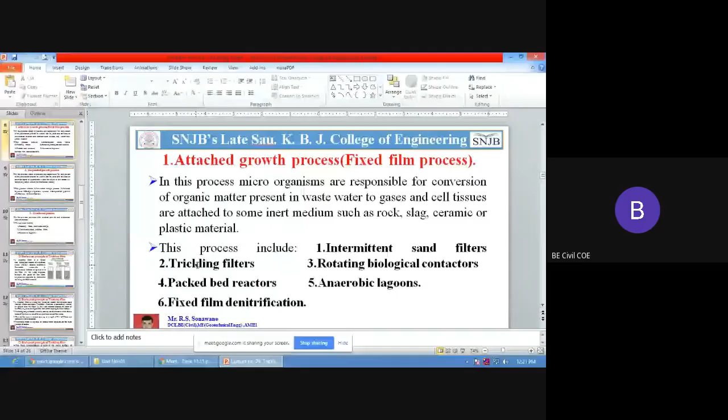So, is my screen visible, everyone? Is it visible, everyone, my screen? Yes or no? Yes, sir. Yes, sir. No, sir. Yes. Yes. Yes, sir. Okay, now. Okay, very good.

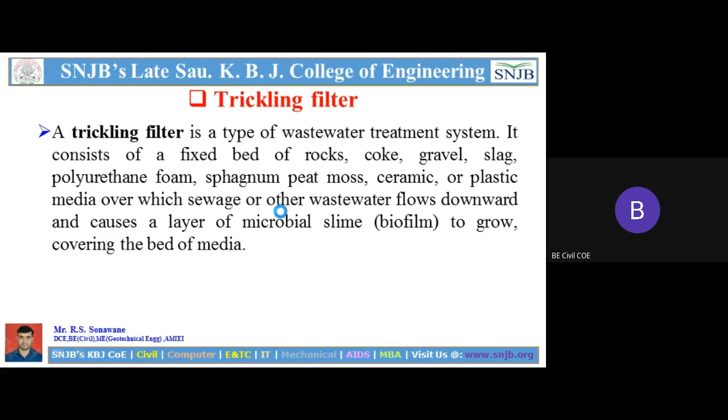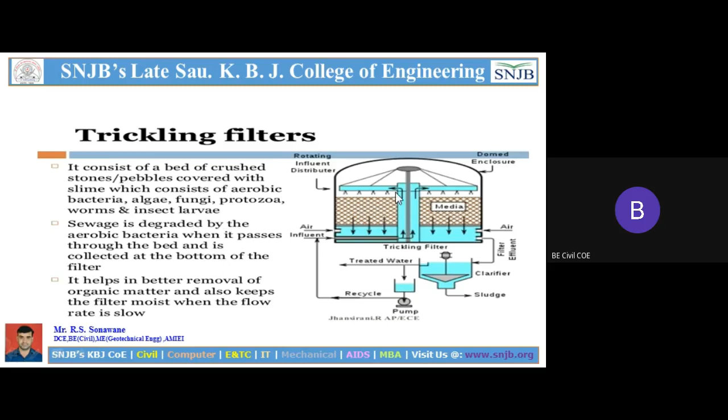It passes through the bed and is collected at the bottom of the filter, which will be the clean water. It helps in better removal of the organic matter, and also keeps the filter moist when the flow rate is slow. Okay, so these are some theoretical concepts and the working process of a trickling filter.

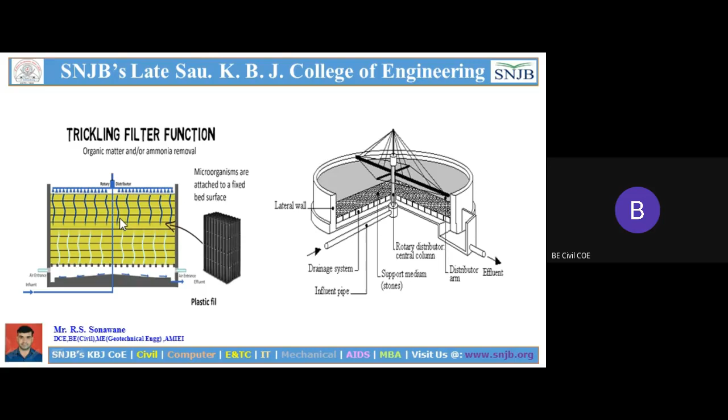In the media, there may be plastic media provided. Here is a plastic media in this picture, and the microorganisms are attached to the fixed bed surface. Once again, the plastic media has microorganisms in terms of bacteria, algae, or different types of microorganisms, and it helps in aerobic condition to degrade the material which is in the form of pollutants. This is about the detailed features of a trickling filter and its function.

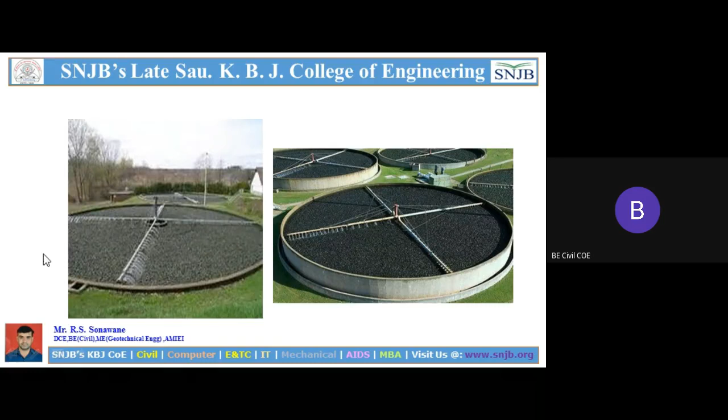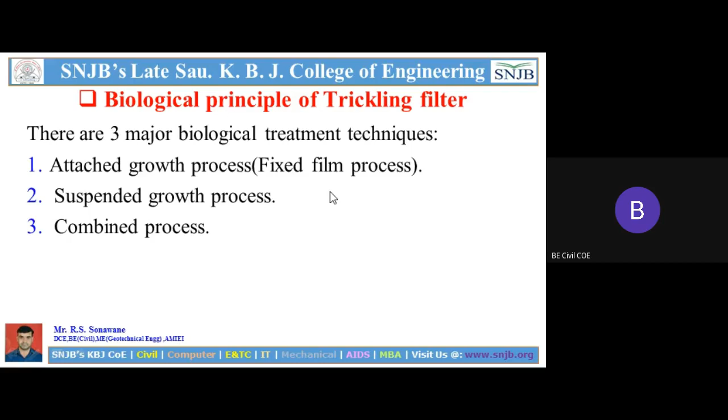So now, what is the exact biological principle of a trickling filter? In general, there are three major biological treatment processes or techniques. First is the attached growth process, that means a fixed film process. The second one is the suspended growth process, and the third one is a combined process. We already discussed this in the previous 2 or 3 lectures. So these three are very important biological treatment processes.

Now we can see which system is involved in the trickling filter. First is the attached growth process, also called the fixed film process. In this process, microorganisms are responsible for the conversion of organic matter present in the wastewater to gas. That means organic matter can be converted into gases, a process called oxidation, and it also produces cell tissue, attached to some inert medium such as rock, slag, ceramic, or plastic material.

So there is some inert medium or inert bed which mostly holds the microorganisms, and those microorganisms are responsible for converting the organic matter to gases or different cell tissues. This is the attached growth process, the first type of biological treatment process. Which units does this process include? Intermittent sand filter, trickling filter, which we are discussing, and rotating biological contactors.

So now it is clear which concept of biological treatment is involved in trickling filters. The trickling filter works on the biological principle of microorganisms responsible for conversion of organic matter to gases or different types of cells, present on different types of bed: rock, slag, ceramic, or plastic materials. This is the simple biological principle of trickling filters, and these units work on the attached growth process.

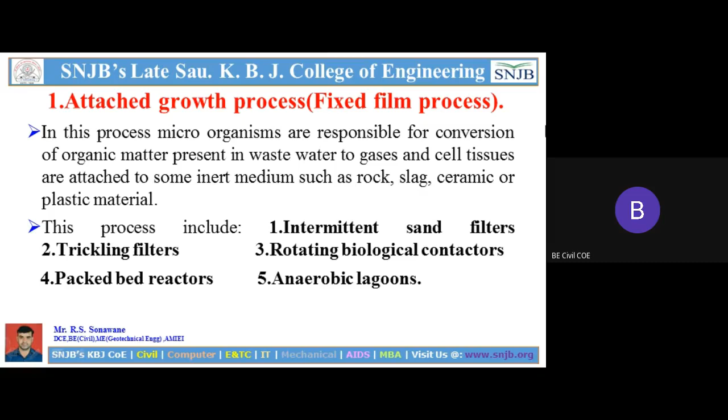This process includes activated sludge process, aerated lagoons, sludge digestion systems, suspended growth nitrification, and denitrification. So these 5 to 6 units are involved in the suspended growth process.

Suspended means what? When the sewage goes into a particular unit, it's allowed some time to settle down all the particles in the bottommost part of that unit. And in this suspension process, organisms are responsible for the conversion of organic matter into gases, cells, or different types of tissues.

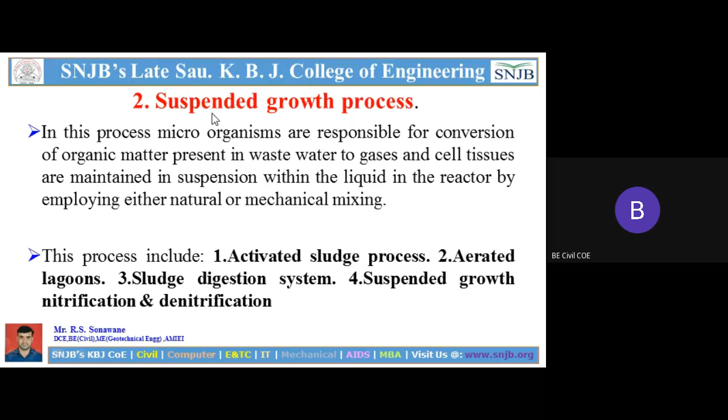Here's only one using a suspension of that particle at the bottommost part, as compared to the previous slide which is passed to a different media, and in that different media there are some microorganisms. The process is the same: organic matter is converted into gases or different types of cells. This is the second biological treatment process.

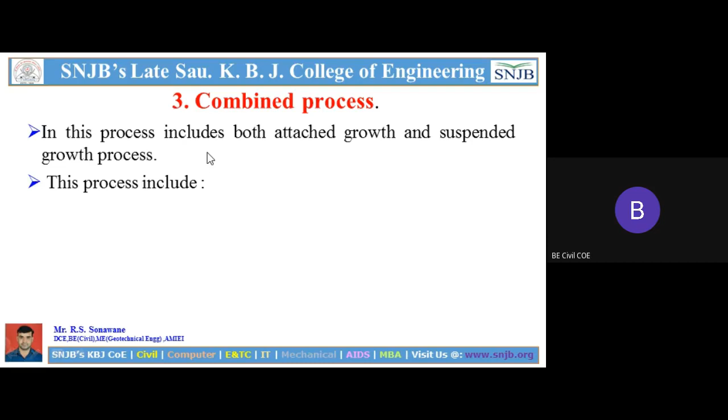Now the third one, the process included both attached growth and suspended growth. In this combined process, both may be happening: suspension as well as passing through different types of media where microorganisms are already present, and they help convert organic matter into gas or different types of cells. This process includes trickling filter also.

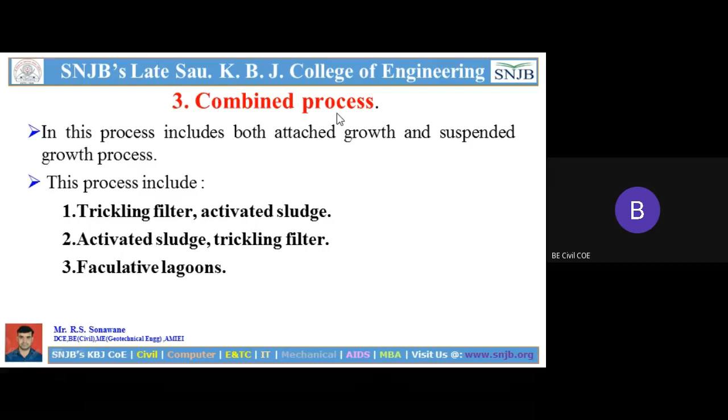This process includes trickling filter, activated sludge, then activated sludge and trickling filter combined - this is a combined process. It may be trickling filter plus activated sludge, or activated sludge plus trickling filter, or facultative lagoons. These three combined processes represent the combined principle of biological treatment. So this is about the three principles of biological treatment.

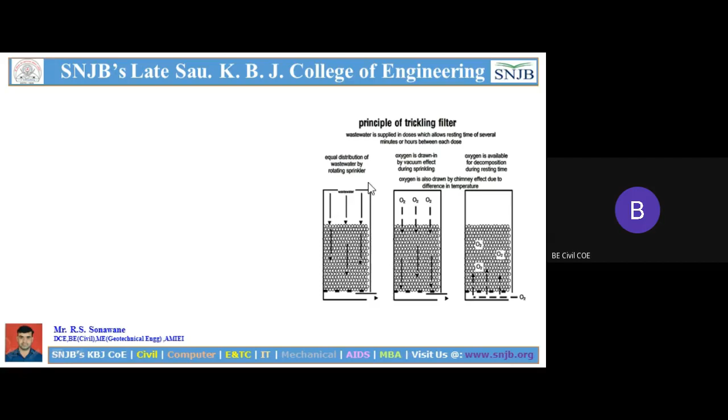So mostly in the principle of trickling filter, here are some pictures I put. Is it visible everyone? Yes sir, okay, now you can see here.

So first is equally distributed wastewater rotating in a sprinkler. That means, as seen in the previous slide, one sprinkler is continuously rotating in a circular manner, and the arrowhead mentioned in downward direction means that sewage water is allowed to pass through this media in a vertical direction.

Is that clear? So the second picture shows O2. That means when sewage is allowed to pass through this media, atmospheric, natural, or artificial oxygen mixes in that water, and the process of oxidation happens. It's the last process.

Once oxygen passes through the different types of media, it interacts with bacteria present in different places of that media - that bacteria consumes this oxygen and the process goes on. This is biological treatment. Is that clear? So there is the oxidation process.

That's the oxidation process - nothing but organic matter converting into gases or different cells. This is called the oxidation process, and it happens once the bacteria consume the oxygen and can easily oxidize it. The other matter settles down in particular units. So these are the principles of a trickling filter in biological treatment.

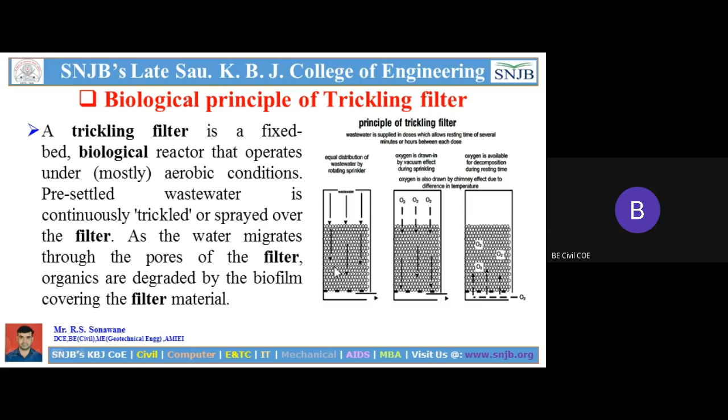The pre-settled wastewater is continuously trickled - trickle means nothing but sprinkled over that media. The word trickle is used for sprinkling the water over that bed or media. So this is called trickling, or sprayed over the filter as the water migrates through the pores of the filter. Organics are degraded by the biofilms covering the filter materials.

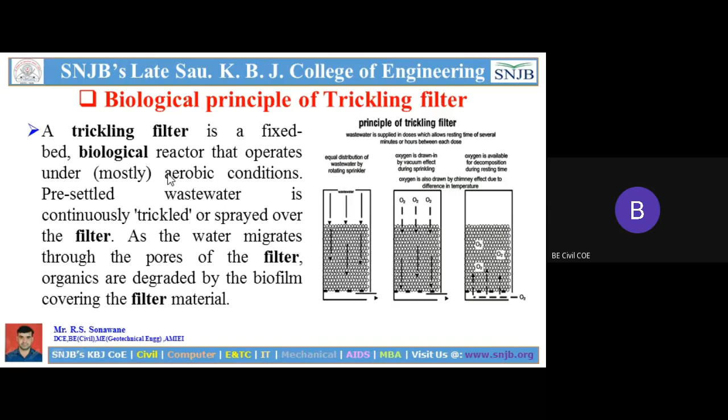So just I told about this up to this slide - this is about the trickling filter. Now in the biological principle of trickling filter, you know this is trickling over the media. The biological purification is mainly done by aerobic bacteria - just I told you about this also - bacteria known as biofilm.

So which form of bacterial film is formed in different types of layers, different types of bed - that layer or bed is also called a film. They may help in purification. That is known as the biofilm or the slime layer around the filter media.

This biofilm layer is aerobic only up to a certain depth - here are some given restriction values of aerobic media. The biofilm layer is aerobic only up to a depth of 0.1 to 0.2 mm, and the remaining part is anaerobic. So in that different layer, bacteria are present only at a depth of 0.1 to 0.2 mm. You can imagine how thin this layer is - about 0.1 to 0.2 mm only. After that, all the media becomes anaerobic. Is that clear?

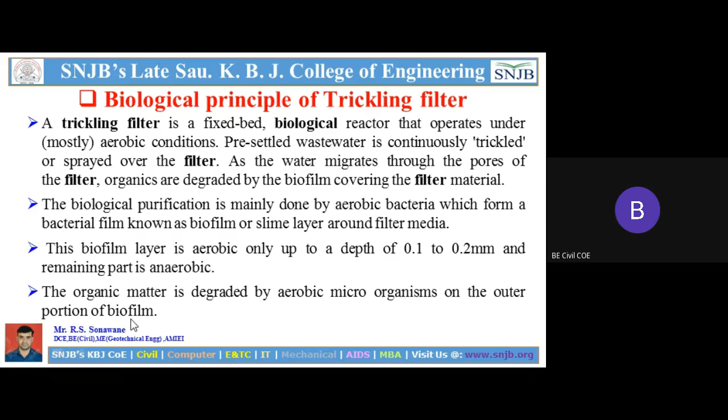So the food concentration is high at the outer surface of the biofilm, hence the growth of microorganism is more at the outer surface of the biofilm. There are the chances for growth of microorganisms, growth of bacteria, growth of fungi, growth of protozoa, and growth of other microorganisms.

Due to the maximum food concentration at a high rate on the outer surface, the oxidation process happens due to the high concentration of bacteria or microorganism. The most diffused oxygen is consumed by the microorganism at the outer surface before it reaches the depth. Hence the anaerobic environment is developed near the inner surface of the biofilm.

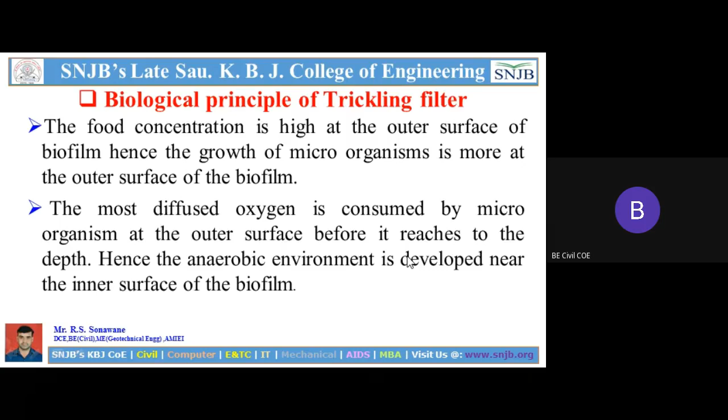So just now I told you about these sentences and their explanation. Now this is a trickling filter media which works here. So you can see here, this is a trickling bed, then aerobic condition and the organic matters. Just in your book also, the textbook, it may be TechMax or Nirali books, they are also given this figure or these pictures about the trickling filter. It's a very simple principle.

So here the arrow indicates the organic matter which is over the bed. Here at the outermost part is present oxygen, other oxidized product, up to 0.1 to 0.2 mm. This is the biofilm, the microbial slime layer, where bacteria, fungi, algae, or whatever microorganisms are present, and this is the process of the aerobic condition, below which there is the anaerobic condition, and then the different types of media.

So in general, or very simply, I understand this picture: allow the organic matter or the wastewater to pass through this bed or biofilm layer, and these are the biofilm stages: aerobic, anaerobic, and then anaerobic continuously.

So referring to the process mechanism, it involves the adsorption of organic compounds in the sewage or other wastewater by the biofilm slime layer, followed by the diffusion of air into the slime layer to furnish the oxygen (O2) required for the biochemical oxidation of the organic compound, that results in releasing gases like carbon dioxide, water, and other oxidized products.

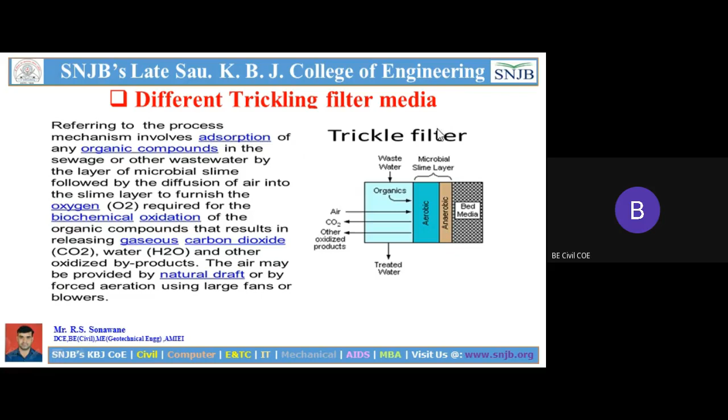questions have been asked in the exam for 6 marks or 5 marks: explain or list the different trickling filter layers and explain each one. So if such type of question is asked in the end exam, just you have to draw this figure or this picture and explain one by one layer.

So as I was already talking about the thickness of that biofilm or the slime area, which is also called the Zoogleal film - the biofilm forming on the surface of filter media in a trickling filter is called Zoogleal film, having a thickness of about 0.1 mm to 0.2 mm. Then composing the bacteria - that layer is composed of bacteria, fungi, algae, protozoa, and other life forms, these are the microorganisms.

Then sloughing - now there will be a sloughing action. Now what is the sloughing action? We will see here: the microorganisms next to the filter media lose their ability to cling to the media. That means the microorganisms next to the filter media have lost their ability to cling. Cling means they are not working, they are not working with respect to the biological treatment principle. At that time, that process is called the cling process to the media.

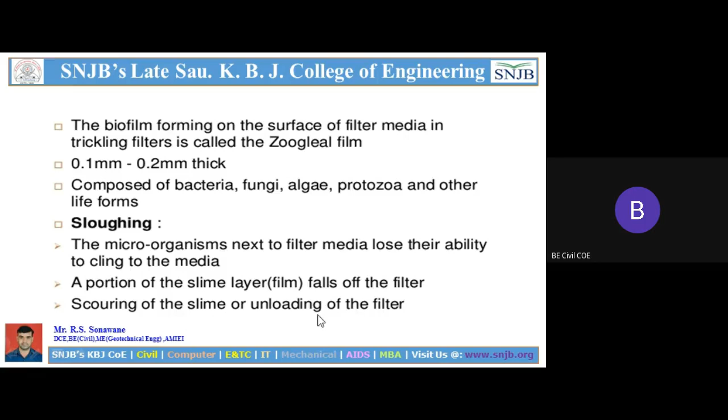Now, types of trickling filter. They are classified first according to organic and hydraulic loading, and second, according to the number of units used in series. These are the two basic classifications of a trickling filter - organic and hydraulic loading, and how many units are used in series. So it is classified based on these two objectives.

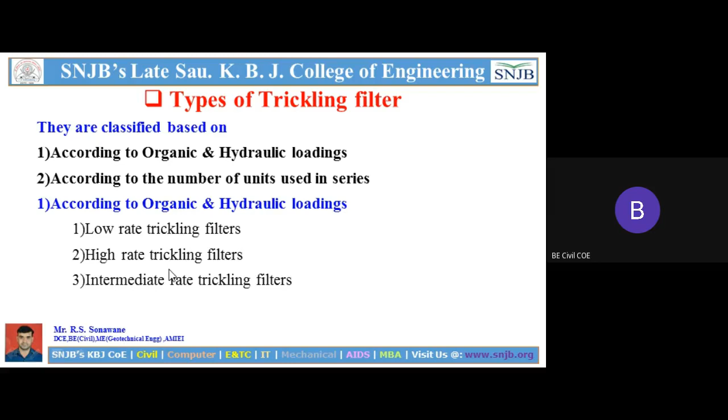First we will see, according to organic and hydraulic loading: first is low rate trickling filter, second is high rate trickling filter. Third is intermediate rate trickling filter, and fourth is roughing trickling filter. These four are part of hydraulic loading and organic loading of a trickling filter.

Second, we can classify according to number of units used in series. There is first single stage trickling filter, and double stage trickling filter. There are only two parts according to stage, single stage and double stage.

According to organic and hydraulic loading, first we see low rate trickling filter, which is also called in short form LRTF - low rate trickling filter. Many times questions are asked about low rate trickling filter, high rate trickling filter, different numericals on low rate, high rate, single stage, double stage. So we are trying to cover these two topics which are very important from this subject's point of view - first, according to organic hydraulic loading.

So first we see low rate trickling filter here. It's a relatively simple treatment unit that normally produces consistent effluent quality, even with varying influent strength. This is a relatively simple treatment unit, low rate trickling filter, which mostly normally produces consistent effluent based on quality with varying influent strength. This is about low rate trickling filter.

They are generally not provided with recirculation of effluent. You know that in activated sludge process, after treating the water, it goes again into recirculation for recycling the particular sludge. But in this low rate trickling filter, they generally do not provide such recirculation of effluent.

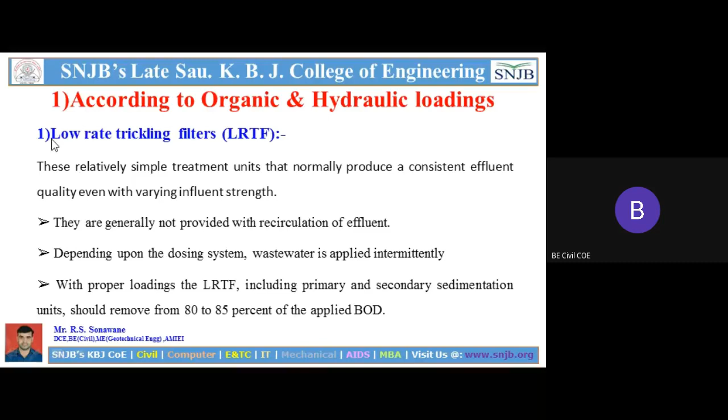Third, with proper loading of LRTF (low rate trickling filter), the primary and secondary sedimentation units included should remove 80 to 85% of the applied BOD. With proper loading of LRT required for primary and secondary sedimentation tank, if nearly 80 to 85% BOD is already applied, mostly the loading on LRT is low, so you can use or they use low rate trickling filter here.

Then according to organic hydraulic loading, there are high rate trickling filters, also called HRTF. Envisage this particular trickling filter unit as high rate when recirculation is used. So in low rate, there is no recirculation provided, but in high rate trickling filter, recirculation is provided and used. The hydraulic loading per unit area of filter media is increased.

For recirculation purpose, as a result, higher flow velocity will usually occur, causing more continuous and uniform sloughing of excess growth. Due to the recirculation process, there is an increase in unit area of that particular media as well as the biofilm, resulting in sloughing of excess growth there, continuously due to the sloughing action.

High rate trickling filter, including primary and secondary sedimentation, should be under normal operation and remove 65 to 85% - for the high rate trickling filter series, before wastewater enters the particular trickling unit, the primary and secondary process should be under normal operation, and should remove 65 to 85% of BOD of the wastewater.

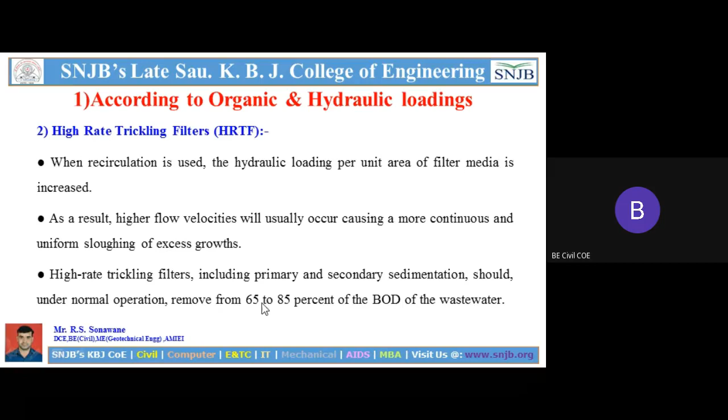be done there. So now what is the roughing filter? As we saw in the previous two slides, there are four types according to organic and hydraulic loading. First was low rate, second was high rate, third was intermediate, and fourth is roughing. Intermediate is not important; the last one is a roughing filter. Roughing filters are high rate types of filter designed with plastic packing.

So what is a roughing filter? It is a high rate type of filter, but mostly in this type of filter plastic packing media is provided. You know that media is usually in the form of rock, ceramic materials, gravels, but in this particular filter plastic media packing is provided.

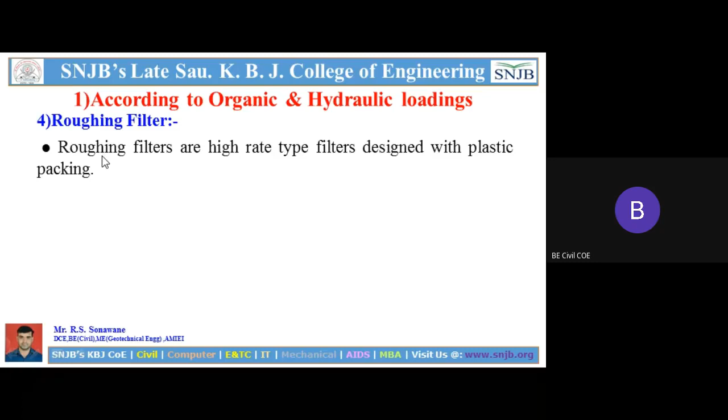So in most cases roughing filters are used to treat wastewater prior to secondary treatment. Low energy is required for the BOD removal of high strength wastewater as compared to the activated sludge process, because energy is required only for pumping the influent wastewater and the recirculation flow. So this roughing filter requires low energy, only for pumping the influent wastewater and recirculation.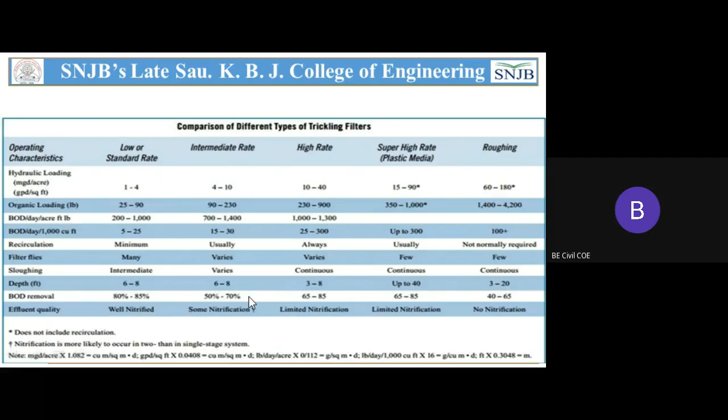After comparing these types, you can easily say the most effective, 80 to 85% BOD removal, happens in the low rate. Then effluent quality: well nitrified, some nitrification, limited nitrification, limited nitrification, no nitrification. Comparatively, the low rate trickling filter gives a well nitrified effluent. So this is some comparison of trickling filters related to loading. For today's lecture, this is sufficient.